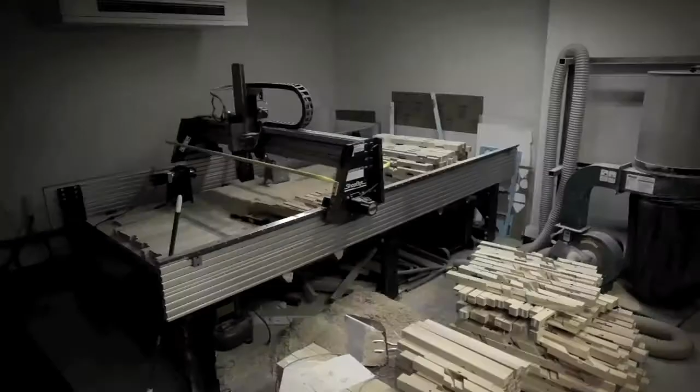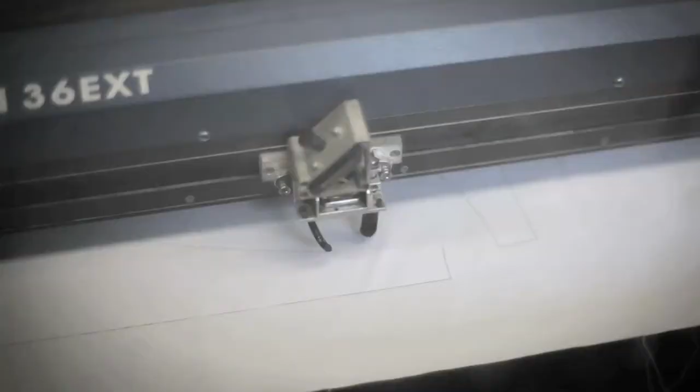Well, MIT is a very different kind of institute. Instead of becoming the recipients of building industry culture, we can now change building industry by the kinds of experiments we're doing in school. MIT has a variety of departments that are so powerful that they have the potential of radicalizing what we do in design and in the architecture department.

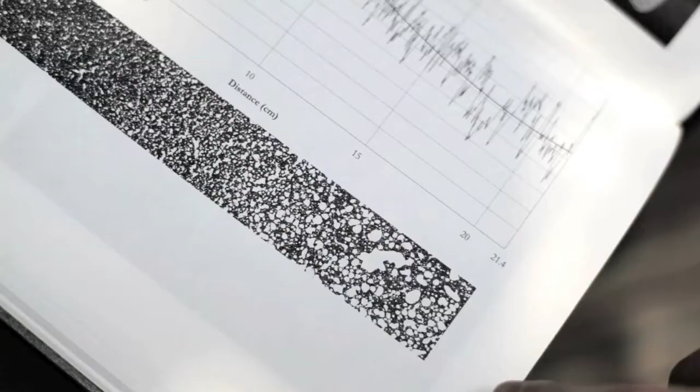Even the way that we've structured our curriculum around workshops and other kinds of collaborations in a way foster and encourage this kind of cross-disciplinary platform. So we're situated perfectly for the kinds of things that only MIT can do.

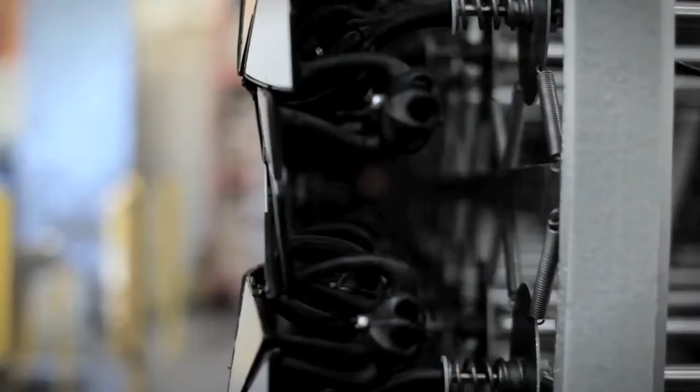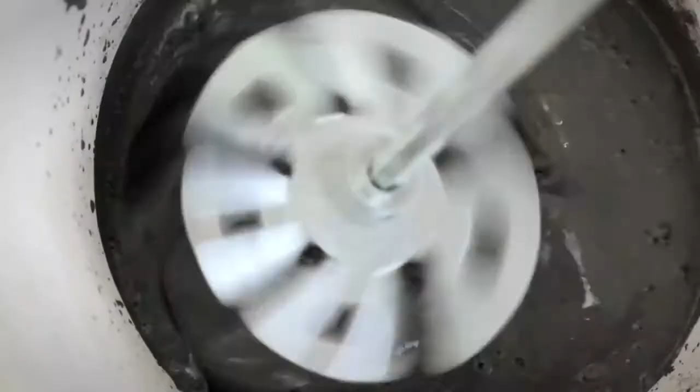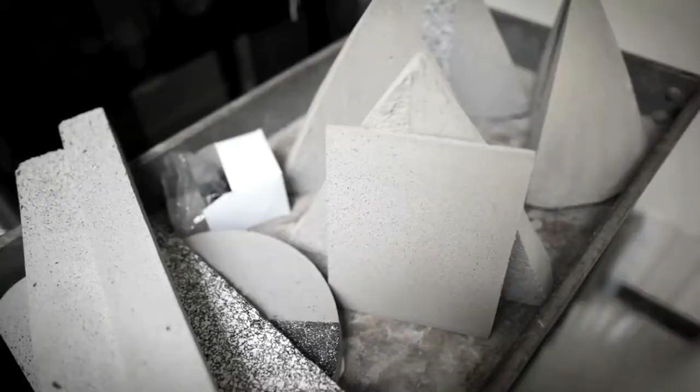The invention of human artifacts of any kind always consists of three elements: the geometry, the process, and the material that constitute that artifact. It's very clear that new materials engender new forms, and architectural design benefits from addressing, applying new materials in an informed way.

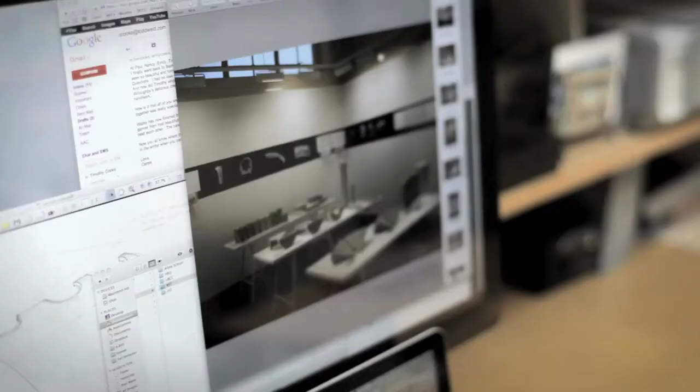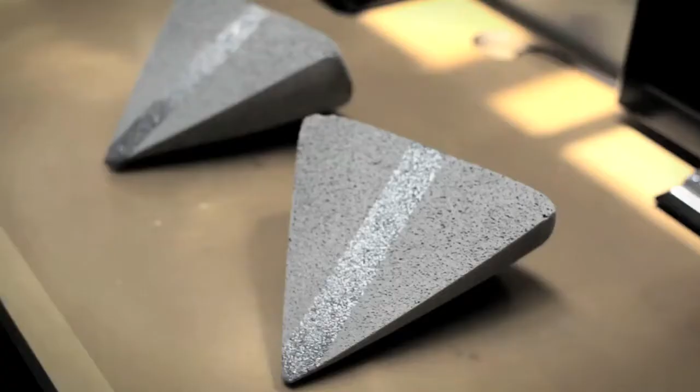The Emergent Materials Group and the Urban Metabolism Group share a central interest in materials for the built environment. Lately, we've been working a great deal in the area of foamed materials, especially foamed cements and concretes. So typically, beam in bending is going to have the greatest amount of stresses on the top and bottom, so we can reduce the amount of material on the interior of a beam.

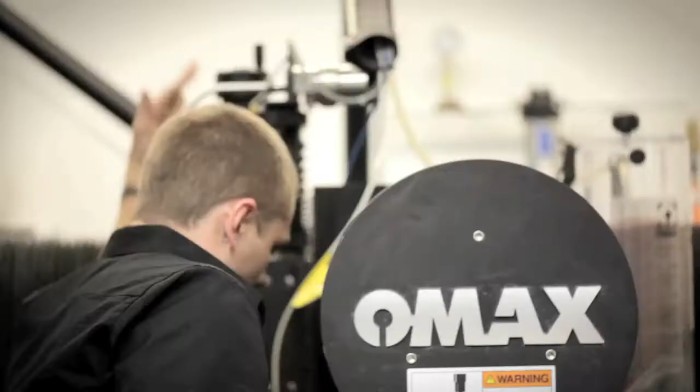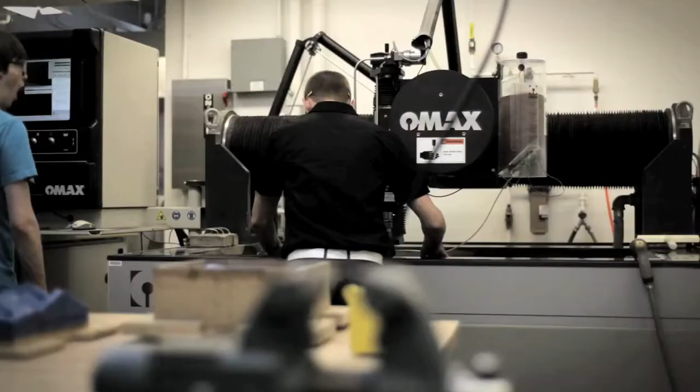The work really tries to address that there's two main paradigms throughout almost every industry. The one paradigm is what can you design, what can you compute or analyze, and the other paradigm is what can you physically construct or what can you build.

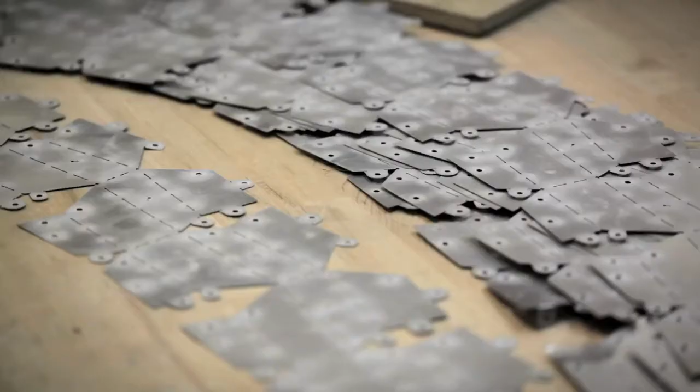The work really tries to traverse all scale lengths. It tries to work from the nanoscale, which is traditionally where we see self-assembly in biological examples, chemical examples, and it tries to bridge that and say, can't we use this phenomenon of self-assembly as a new paradigm for building things at large scale?

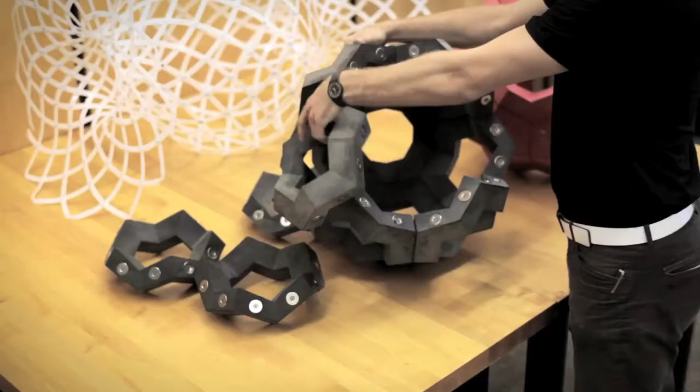We work with any type of material, synthetic or natural materials, and really try to design specific geometries that have materials in mind. And when you design those two together, they can respond to energy. And the energy sources can be heat, shaking, gravity, pneumatics, electronics. So you can use any type of energy. And when you mix that with the geometry and material properties, then they can respond and they can change state.

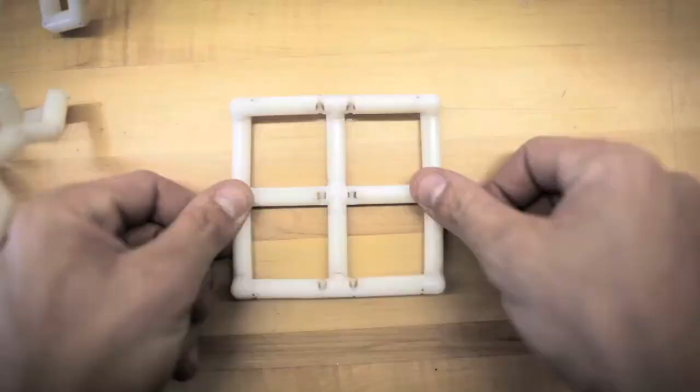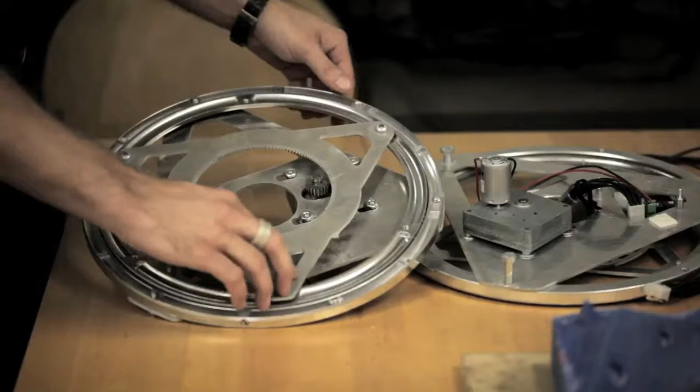Primarily, it will first be applied in extreme environments, scenarios where it's difficult to build. The research and the practice is really about cross-disciplinary collaborations between designers, scientists, engineers, working on this phenomenon of self-assembly, discovering where we find it naturally, where we can use it synthetically, and trying to apply that at all different scale lengths.

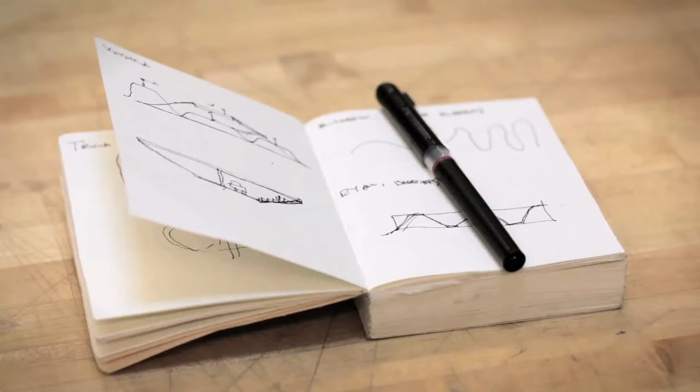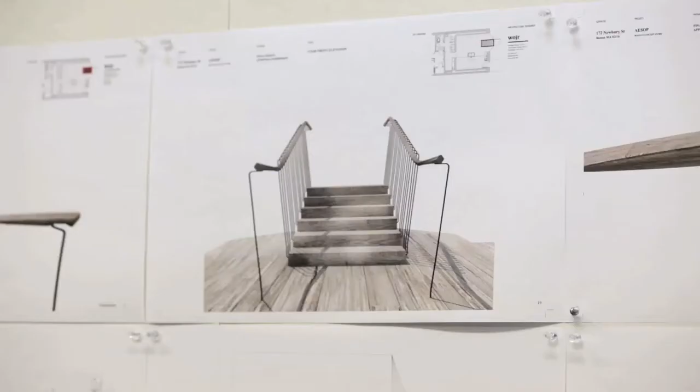The focus of our work, at least at this smaller scale, at the scale of, say, art installations or retail, we leverage CNC fabrication methods, but not as a way to exude their prowess necessarily, but more as a way to help us get at a particular formal agenda. An installation called Totems, which in a way is a kind of proto-architecture, not quite architectural, not quite sculptural, but I think that it offers a kind of proposition to each of those disciplines.

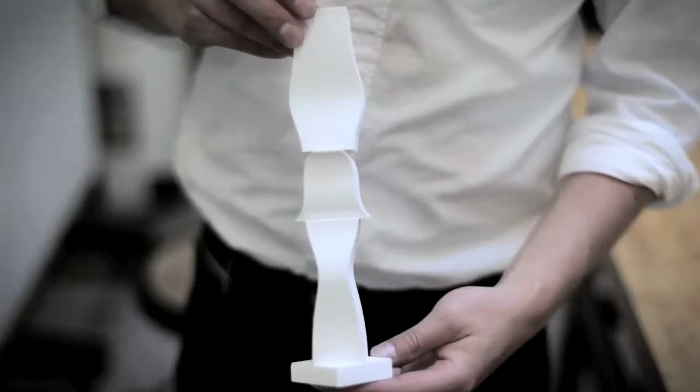We do a lot of testing via 3D prints. A lot of the formal investigations for Totems specifically happened in 3D prints. We did maybe 30 to 50 3D prints of the totems as a way to understand how the light and shadows were working and how best the anamorphic effects were working before we went to the large format wire cutter.

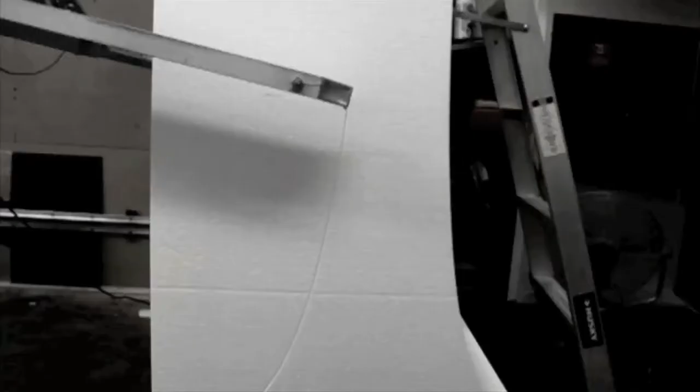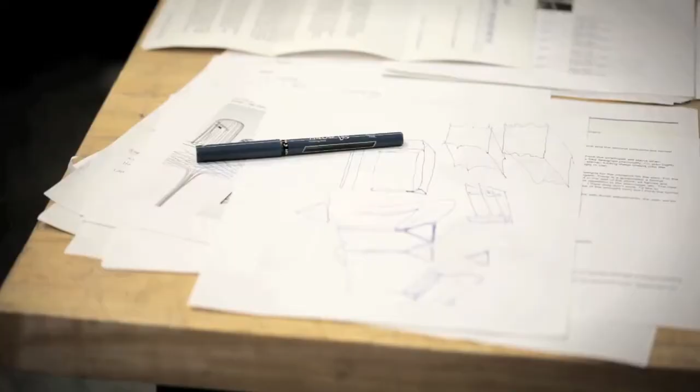In terms of collaborations, some of those happen here at MIT. Joel Lemire and I are developing an installation now, which is an anechoic chamber, and the anechoic chamber uses industrial felt both on its exterior and as a way to absorb sound on the interior. I'm bringing a kind of disciplinary or formal or geometric interest on the one hand, also a certain set of specialized understandings of the behavior of these sheet materials on the other.

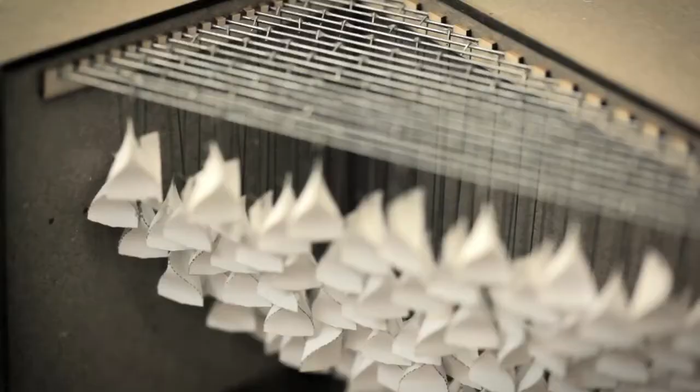So my architectural interests are really broad, but in terms of my current research preoccupation, it's about material geometry, specifically sheet shapes or sheet material geometries, how they bend, stretch, stack, fold. But obviously understanding sheet materials is really critical to architecture. It's a sort of a long-standing discourse on sheet materials in architecture, in part because it's so ubiquitous in conventional construction.

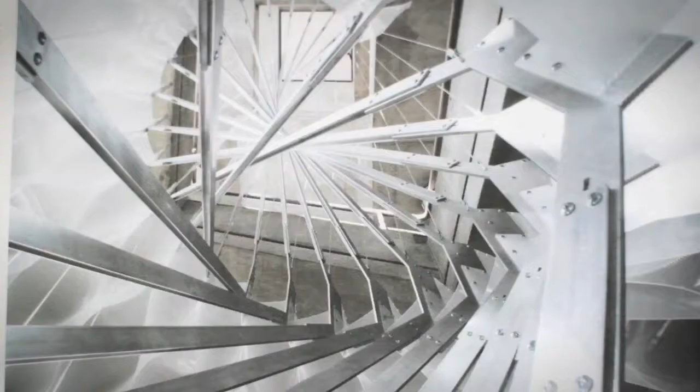So everything including plywood, sheet metal, steel, aluminum, plastics, all of these have to deal with the developable surface geometries, which is to say sheet shapes generally. And so expanding the total set of understandings about sheet shapes is a totally and kind of obviously worthwhile architectural undertaking. These installations attempt to jump from the scale of the paper model to the scale of the architectural space at the very least.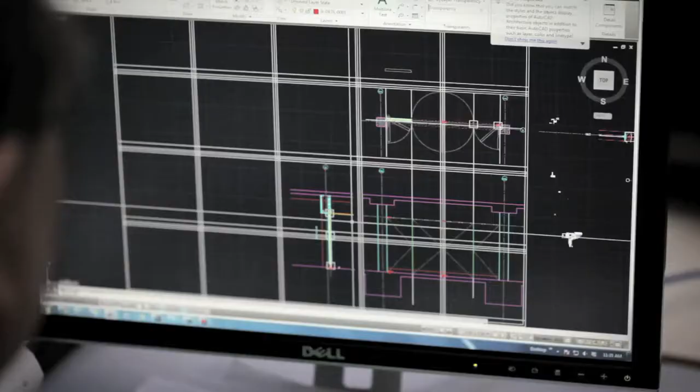Well, over the past 20 years, first as Office DA, now as NADAAA, we've identified 2 or 3 areas of focus. The first has been to look at materials and their behavior as a point of departure for many of the architectural experiments we do.

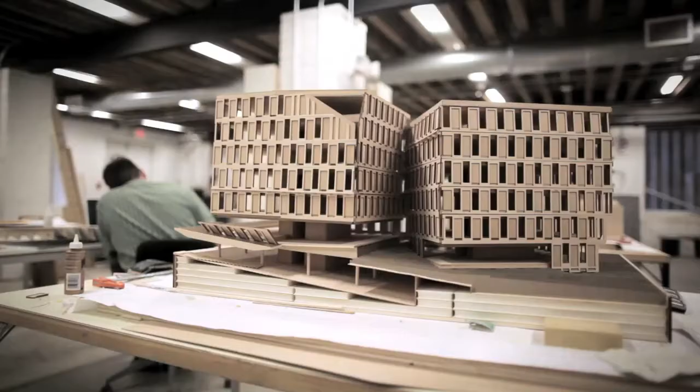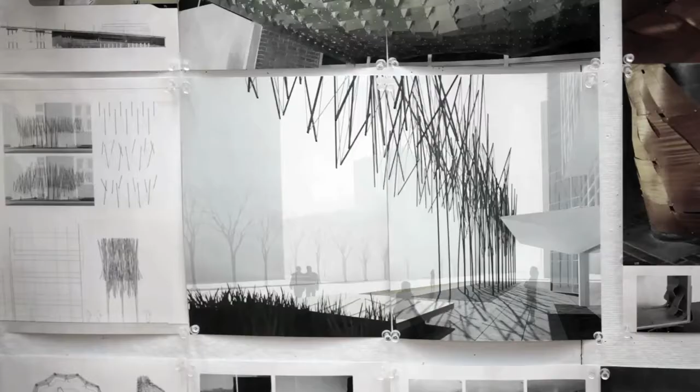The second area is to recognize that materials don't have an endless limit. Everything comes in modules, in sheets, in blocks, in bricks, and without aggregation, there's no way of beginning to figure out how construction works in general. So the detail of bringing things together as a point of departure has been another central focus.

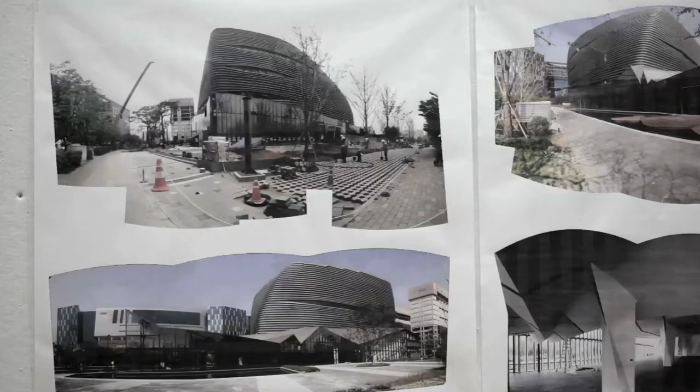So this has been a kind of point of revolution for a range of projects that we've researched and undertaken, some of which are at the scale of a piece of furniture, others that are at the scale of a building, and others that are really at the scale of urbanism.

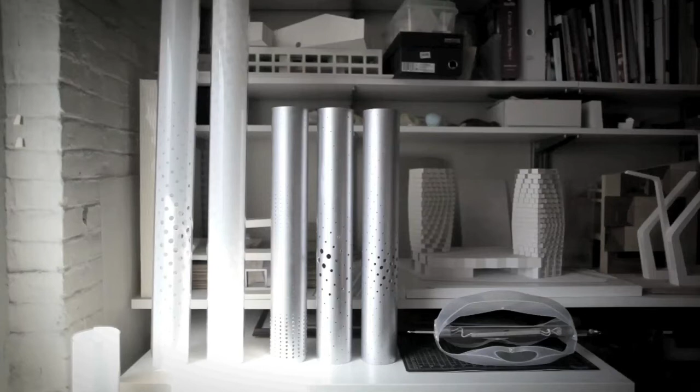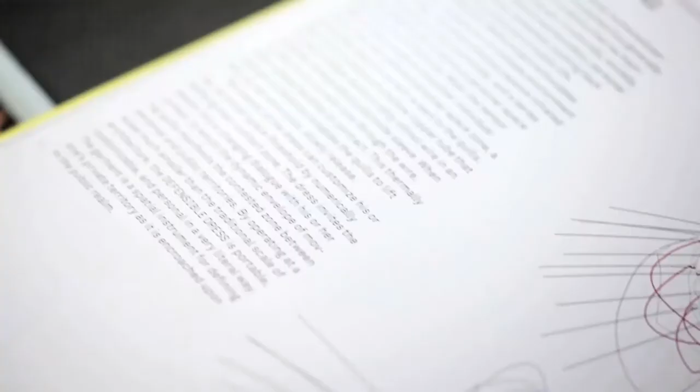One of the agendas of the studio is to create interactive architectures for public space through design and technology. And these projects can range in scale from the scale of the body, such as the Defensible Dress Project, which is a wearable architecture, which uses a microcontroller and shape memory alloys to defend your personal space,

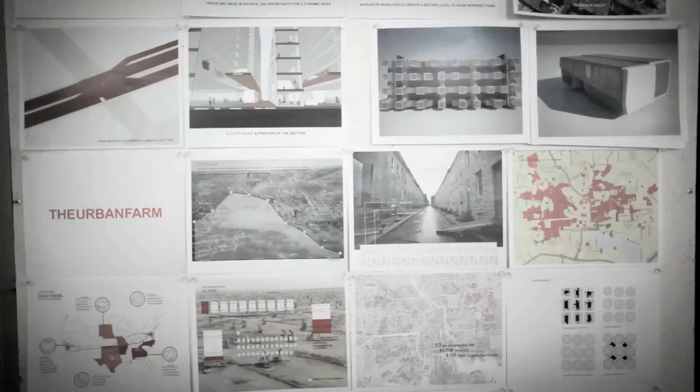to very public scale infrastructural projects, such as our proposal for the Audi Urban Future Initiative, where we're speculating on high-speed regional infrastructure and transformations in the city around issues of mobility for the year 2030.

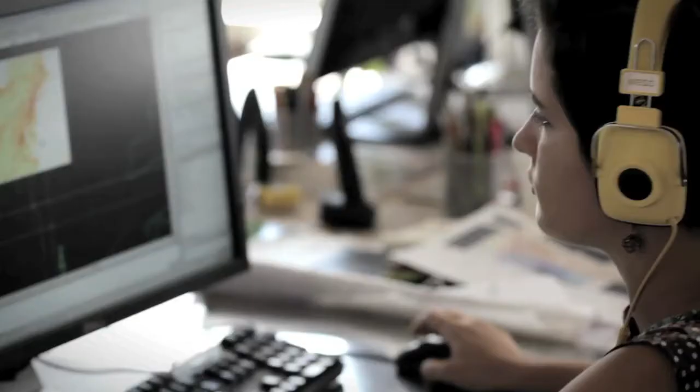It seems now more and more necessary that our environments have to become smarter, more responsive, and more flexible. The way in which architecture is made needs to be completely rethought if we're to go beyond bricks and mortar to engage the challenges of the next century.

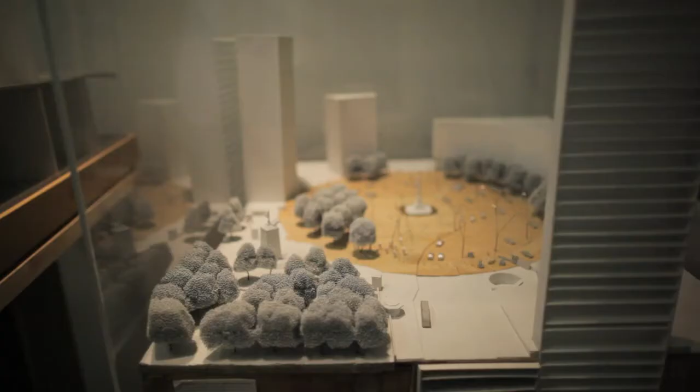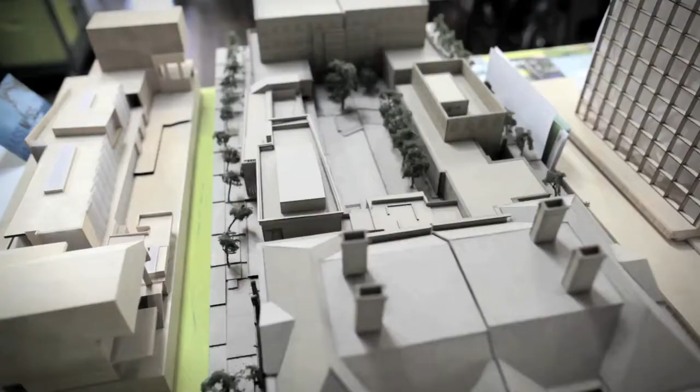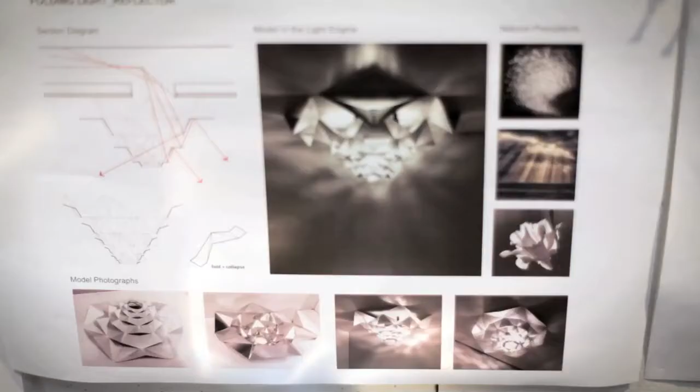My work as an architect focuses on designing architecture and urban scale interventions that engage the emergent infrastructure of our time. We're interested in how design engages that mutability between energy and matter, when materials generate energy or store it, when materials are dynamic and change state, exchange heat, produce light, or communicate information.

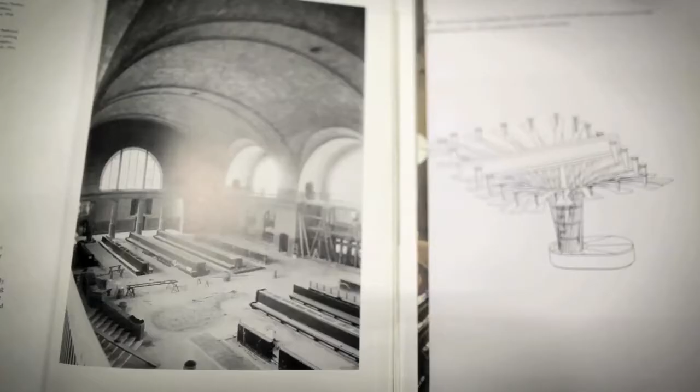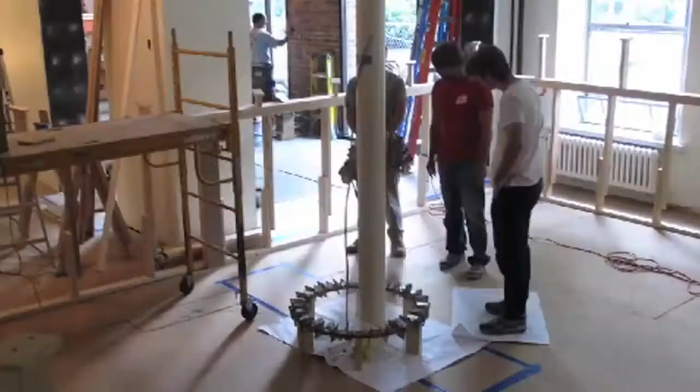The challenge, I think, for the discipline of architecture today isn't in digital fabrication, it's in material fabrication. In thinking about what it means to be material today, when we move fluidly between digital and physical realms, how we use materials and not waste them, and how we form materials and how we transport them.

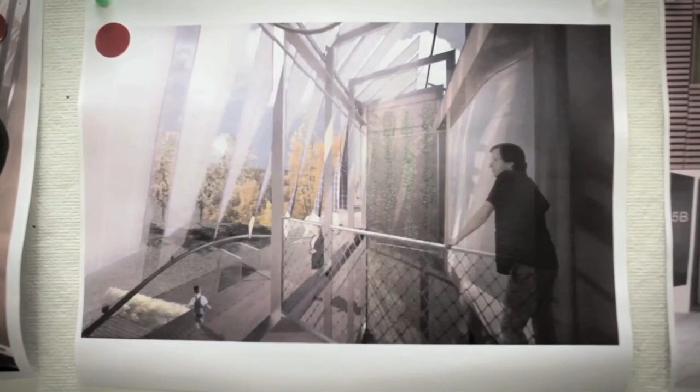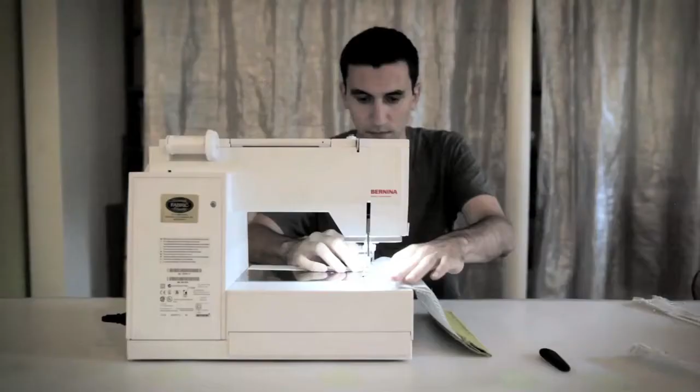If we're going to change the building industry and regenerate an innovation-based manufacturing segment in the United States, then I think we need to do this from within practice, working with the norms of the building industry, but not settling for those norms, instead innovating to both accept and transform those standard conditions.

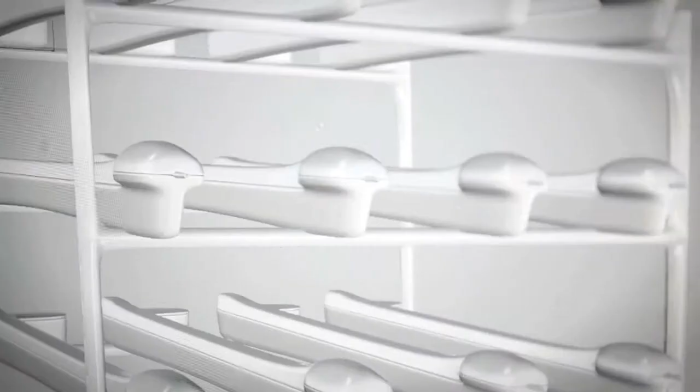I think we're pursuing several initiatives relating to computational material in several different areas. Dynamic interactivity is one with Hypersurface, and we're driving that forward. Imagining actively alloplastic environments. If you like, it's a demonstration of the power of computation come real time.

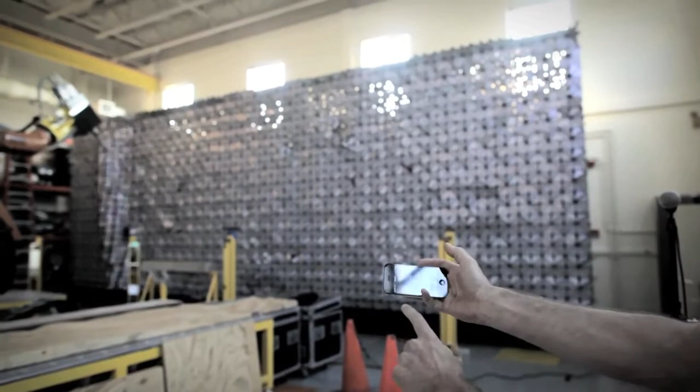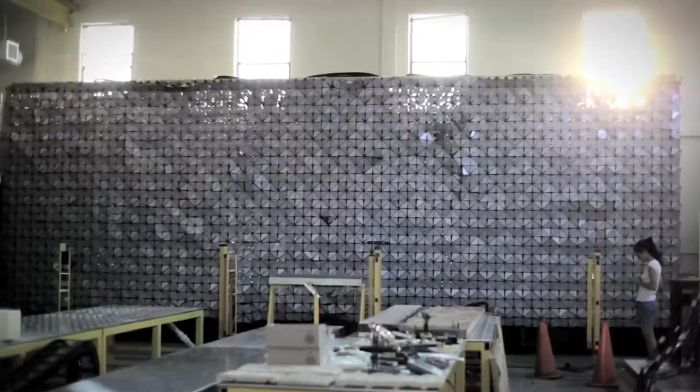Then in the robotic manufacturing work, we're looking for power, information and material all coming together, but with control directly at the architect's workplace. So we're developing tools that allow architects within their native software like Rhino to pilot a powerful production machine like a KUKA robot,

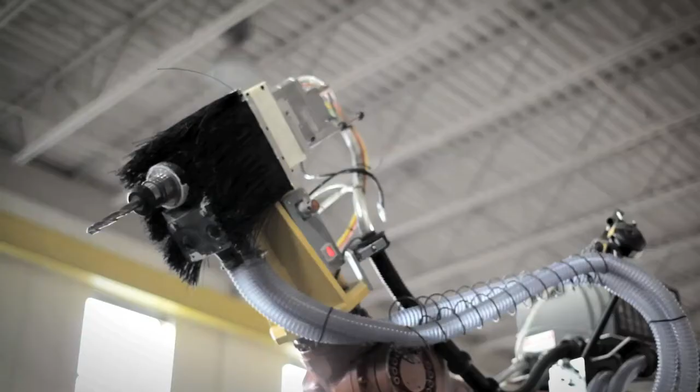demonstrating, I think, what will be the future of manufacturing, which is sophisticated algorithms and modeling that link directly to sophisticated manufacturing machines and allow both new efficiencies but new versatilities, new formal complexities.

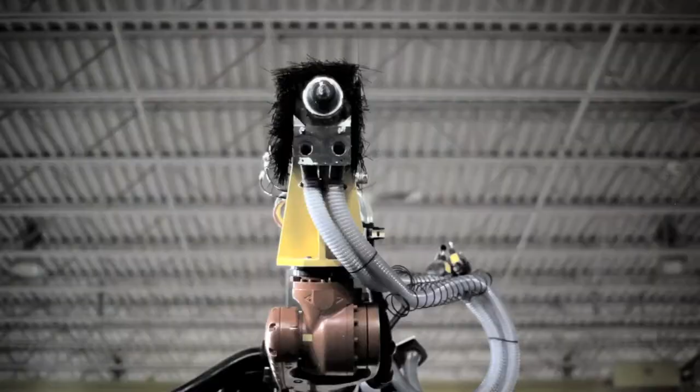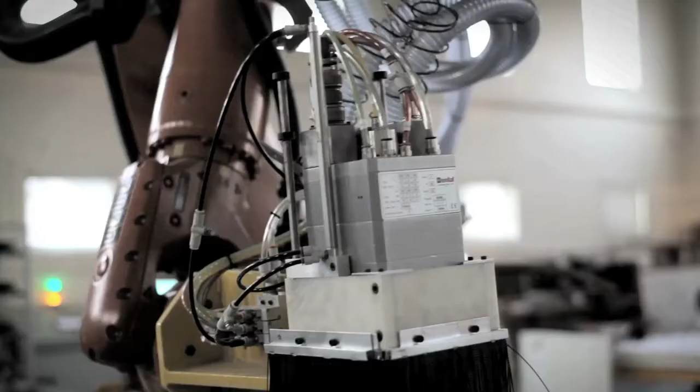I'm also frustrated by the slowness of the building industry to innovate materially. There's a fantastic amount of research in material science that's pent up and is just dying to come at a period where the environmental concerns are becoming so enormous, and the challenge of building the developing world is so extraordinary that they're necessary.

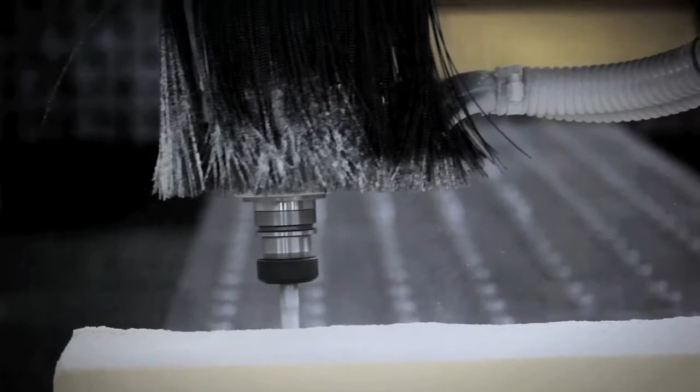CAD/CAM meets material science like composites, I think, is going to breathe a whole new life into the architectural and building industries.